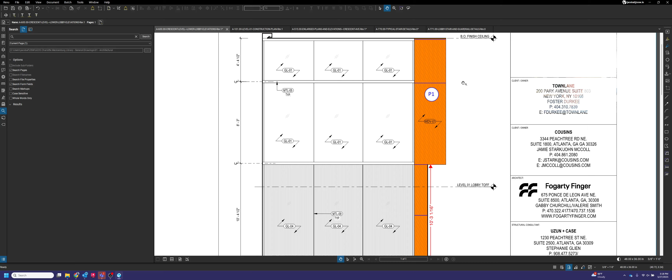When you get to the very top here, this 3/4 inch reveal that we've been talking about, this will be a 3/4 inch full depth reveal. Full depth reveal, all that is, you have a block of material that sits behind the panel, finished with the same material as the panel face. And so everything looks like it's all veneer, but there will be a small gap up there at the top. And we'll see that in our section view when we go to draw that later.

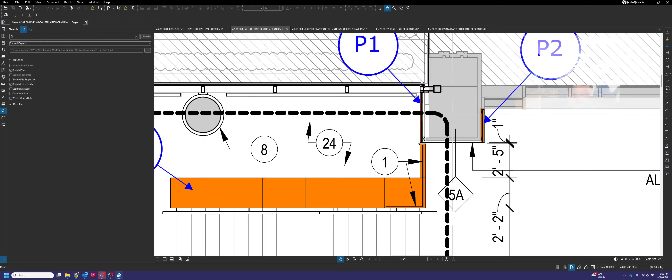Okay, so initial overview for P1. We can go back to our plan view. We've discussed reveal locations. We've also discussed locations of where these live in the drawings from the architect. One area we do need to question is why this length here is different than, or I guess the width here is different than what's shown in the elevation view from the architect.

But we can do that at a later time. Normally, I would suggest at this point putting together a list of questions I have for the project manager and try to ask them all in one email if possible, or one phone call. That way you're not having to call them or email them several times. You can knock them all out here at the same time.

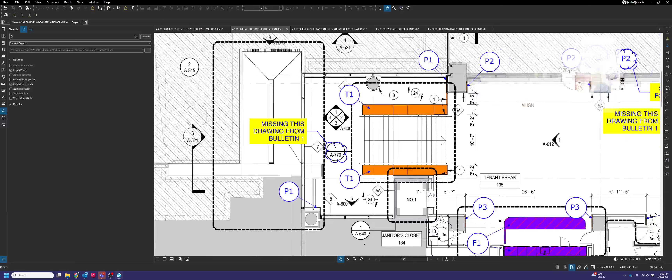So at this point, what I would be doing is rounding up what questions I might have. In our case, the project manager is out sick today. If they were here, I would give them a call, go over that discrepancy where the width is different here versus what's going on in this elevation view. And then I would also bring up the reveal locations and try to confirm if these are in the correct locations for what is expected for the drawing. So a couple things to note there.

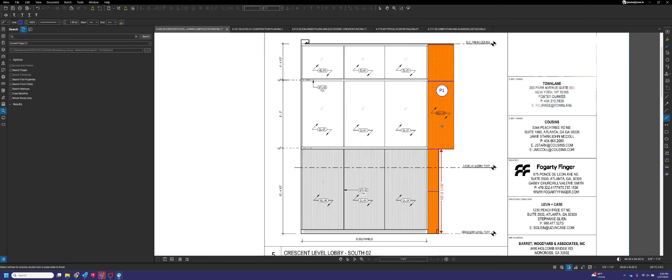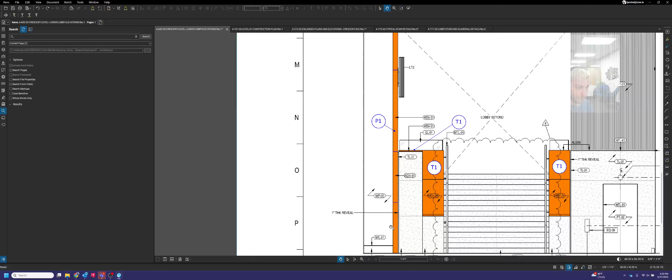These are veneer panels too, by the way. And when you have veneer, you always want to have a grain direction attached to those drawings. In our case, I am going to assume the grain direction is running vertically. It's not clearly stated, and if you look at the hatching on their drawing, it doesn't really do a good job of it because the way they show it, it's almost like the grain is going diagonally. When in all reality, most times panels are not going to look like that. They're most likely going to be vertical here. So I'm going to run with that method of thinking, and we'll assume all these are vertical grain veneer.

All right, and yeah, everything's VN1 it looks like, or WDV01 according to the architect call. So we're going to have one consistent material across the entire drawing, which is great. Makes things a little bit less complicated for us. And you'll see that as we get into drawing panels, there's a lot less notes and complex hardware and different things you have to take note of. Like cabinets, there are so many different hinges and slides and locks and all kinds of hardware. Panels are a little bit more laid back. I mean, they are complicated for sure, but they have a lot less little bits of information to keep track of.

So let's go ahead and begin our drawing here. I'm going to go ahead and get an AutoCAD file open. I need to go to the job folder, drawings, prelim project, and I'm going to pull up the drafting template for this job.

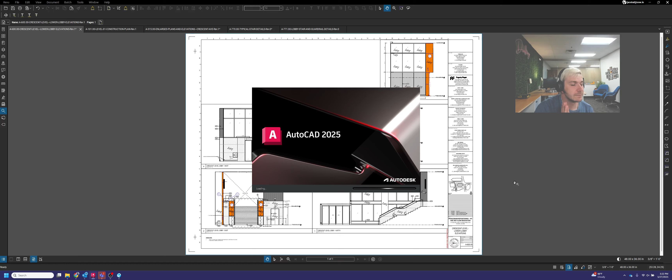Okay, now AutoCAD's taking its time here. I guess while it's loading up, oh, there it goes. Never mind, I was going to say we could look more at the panels, but looks like it'll be up and running in just a moment here. Come on, AutoCAD, you got this. Okay, perfect.

So just like what we've been doing, what I'm going to do is split screen our AutoCAD file with our Bluebeam drawing set. And I'm also going to pull up our drafting schedule over here too. Because the first thing we always want to do with a drawing, once we've opened the template, is fill out the title block on our template, but then we also want to save as and make sure we don't save over the template itself, because this is a community template for the entire drafting team to work off of, so we don't want to claim it as our own and save it as our drawing, because then everybody's going to have to delete it every time.

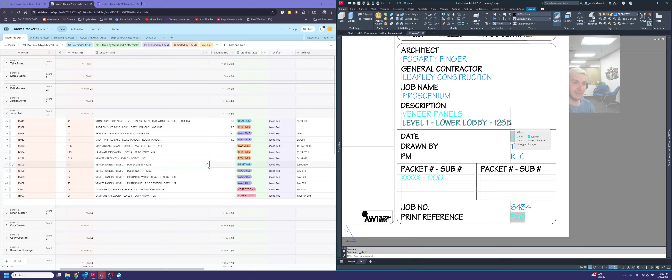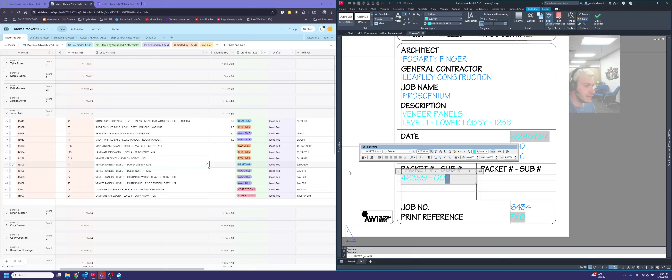So we don't want to do that. What we're going to do here is we're going to write in that these are veneer panels, is our description. We're going to write in here, level 1, lower lobby 125B as the locating area. Okay, and then we need to put in our packet number, which is 46399. And our sub number here, if you scroll over to the left-hand side of your schedule, it is right next to your packet number, 003, just like that. Okay, drawn by, we're going to change those out to be your initials.

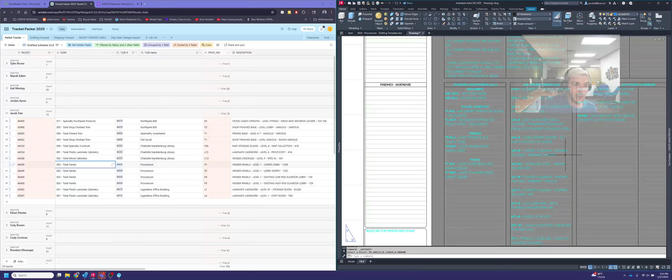And that is all we really need at this time. Now, because we are going to be making all of these panels out of Veneer 1, or VN1, if we go over to the job-specific finish calls, we should be able to locate VN1 in here. Looks like it's right here. I'm going to copy this over using a base point of my grid and pasting it right there.

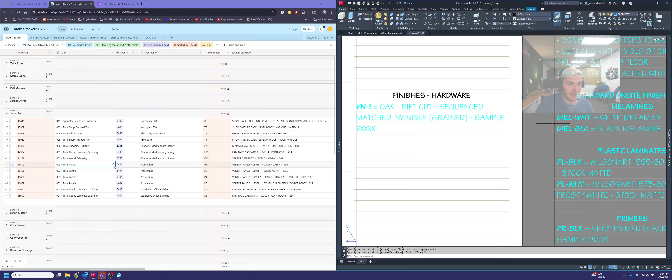Okay, then the other thing I will do, usually save this for last, is fill out the general notes. Because there's a lot less to worry about with panels, it's kind of easy to fill out ahead of time. I think I'm just going to copy this one here: this is all walls, floors and in-wall blocking are by others. We're going to need that note.

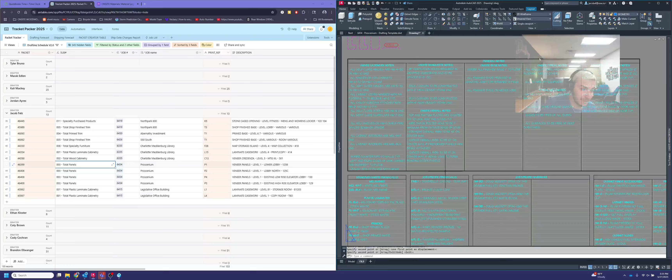Let's see one sec here. Okay, yeah, we're going to need this note here. And then because we're not dealing with any cabinets, we can just ignore this column here. We don't have any banquettes or benches on this drawing, so that note goes away. No die walls that we're building as a company, so we can ignore that area. There's actually no base trim under these panels, which is kind of surprising. Usually panels do have some base trim under them. So anyway, with that being said, there's no notes to copy from there.

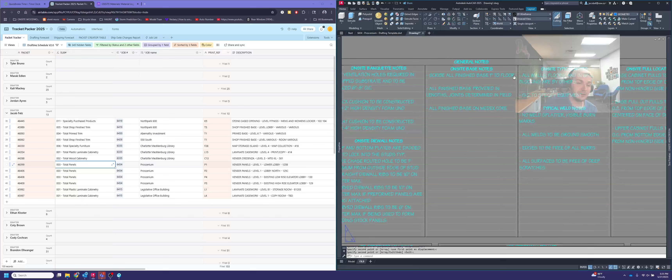No metal shop drawings, so no weld notes are going to be required. And also no pulls since we are not dealing with cabinet doors. So those notes don't apply to this drawing either.

So you're probably thinking to yourself, wow, I don't have anything in my finishes or my general notes. But really, when you're dealing with panels, that's pretty realistic as far as what you're used to seeing. Panels have a lot less information to apply to them, but that doesn't mean they aren't just as complicated as cabinets. To draw them, you still have to take what's in the architecturals, visualize it, and put together a set of drawings, just like you would for any other drawing, like a cabinet drawing.

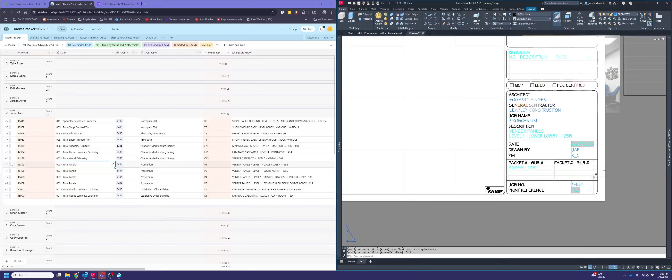So before we move on, what we're going to do is save as, and make a copy of this in the prelim project folder. Let's make sure that we're in the correct job. So we're in Proscenium, Drawings, Prelim Project.

And we need to label this correctly here. So this is P1, PKT 46399. And then I'm going to copy in my description from over here. And I'm going to write at the end, version 1.0, just like that. Go ahead and hit save there.

So we are saving that right to the prelim project folder, and now we are working in our own separate CAD file and not the template.

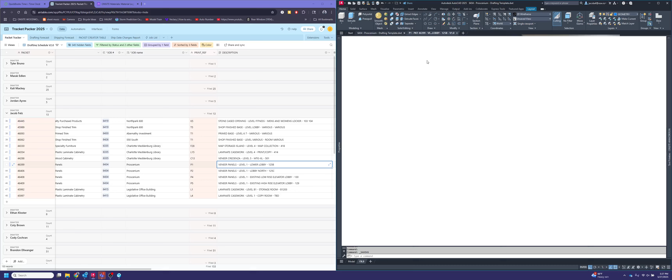All right, last thing before we go into our model space: always remember to change your tab at the bottom to read your print reference rather than the default FX.0. We'll go P1.0 there to match what's going on in our drafting schedule. All right, let's go over to model now. Let's save it one more time.

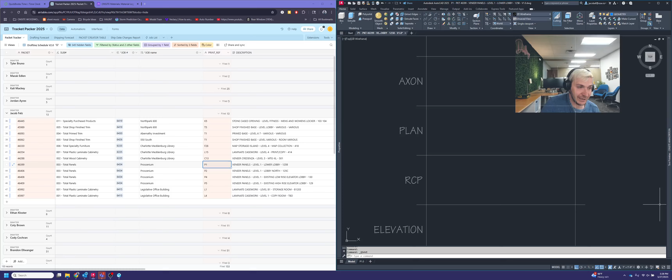Over to our model space, and we're going to start working away at what we have here. So for these panels, it may be easier for us to start with our elevation views and work our way backwards. One thing you can also do, if it helps, is if the project has a floor plan CAD file, you are more than welcome to steal that out of here. Doesn't look like I've actually made one just yet, so we won't be able to steal that exactly, but I'll show you how to do a PDF import so that you can bring in a portion of that floor plan for your drawing. We'll talk about that in a little bit.

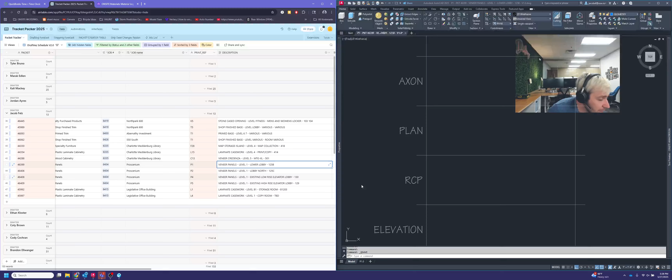We're going to focus on the elevation views first, and then work our way into the plan view after that. So start by pulling up our Bluebeam over here. All right, and we're going to look at the area up here first, the wider set of panels here.

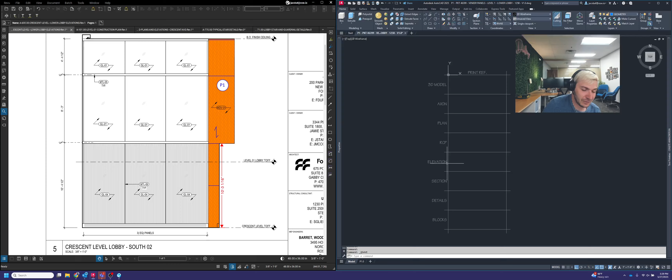Now I am going to plan on moving my elevation view into here later. So what I'm going to do is actually just start off to the side over here somewhere in the blank space and work my way around. All right, so a couple things to take note of.

We know from floor to ceiling, it looks like how tall the ceiling is. If you don't see that here, another area you can look to see if it tells you the ceiling height would be on the reflected ceiling plan. So if you're dealing with, let's see, Proscenium Drawings, Architecturals, and Reflected Ceiling Plan for Level 1. If you are looking for your ceiling height, one really good place to check is your reflected ceiling plan.

More times than not, it is going to be noted here, and it's going to tell you exactly how tall that ceiling is at or above finished floor. So AFF standing for above finished floor. The ceiling here is 15 feet tall.

Let's go back to our drawing and check the math, because that kind of seems a little off. Let me check: 10 times 12 plus 4.5, and then we have 96 for the 8 feet, plus 48 plus 4.5. So 276 inches tall, which is actually 23 feet tall from floor to ceiling.

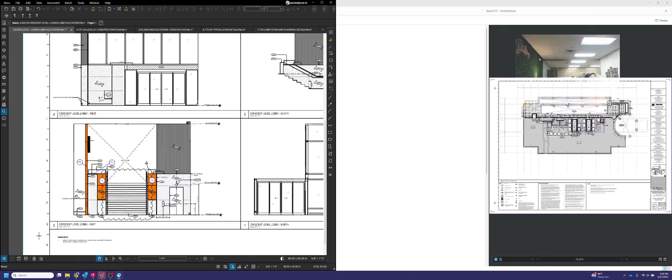So it might be another thing to question the project manager if you're seeing something like that. I'm guessing that probably what is happening here is that they are taking the finished floor from the top of the stairs to the ceiling here. I'm going to guess that is probably 15 feet there, and we can even check it to see.

Not that it really matters to our drawing, but I wanted to rule out any discrepancies we're seeing there. So really it is 15 feet from 15 foot plus a 16th of an inch. I'm just going to say 15 feet from the top of the stairs to the ceiling. That makes more sense, because right here what we were seeing is about 23 feet from the floor to the ceiling here.

This is kind of like a sunken lobby. If you go back to the floor plan, you can see that. This is level 1 here, and this is what they call the lower lobby. So this is almost like a basement level or a walkout basement sort of deal. This is lower than the first floor. So that's 23 feet from the floor to the ceiling here, but 15 feet from the floor to the ceiling there.

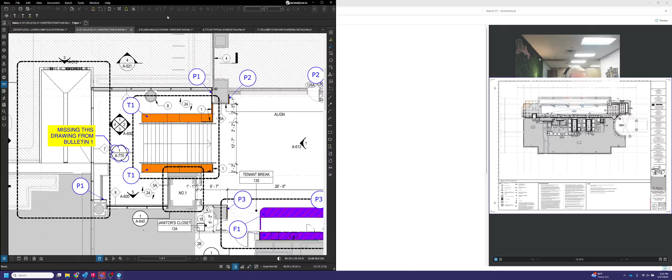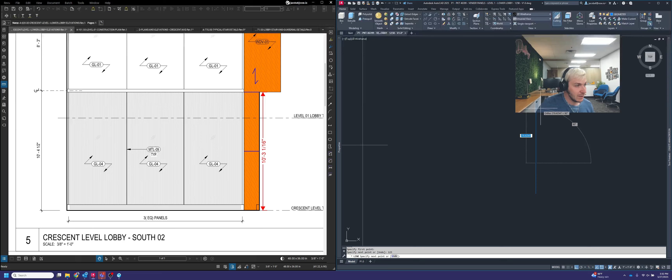Sorry, a little bit sidetracked there, but let's get back to our drawing. Looking at what we've got here, looks like we know that this is 10 foot 3 from the floor to where this kind of L's out. So let's go ahead and draw in a line at 123 inches, or 10 foot 3. We need to find out how far back this sticks out from here to here. Because I don't have that here, I can scale that too.

Sometimes you have to. I would advise not scaling as much as you possibly can, because you're always going to run into some kind of rounding issue. I'm getting a constant extra 16th of an inch for some reason, not really sure why. But I'm going to say this is 1 foot 10, so we'll go 1 foot 10 here.

Okay, so 22 inches across it here. And then from there to the ceiling, we know that the ceiling is 23 feet tall from this floor up, so 23 feet times 12 is 276 inches. So overall ceiling height is going to run all the way up to here.

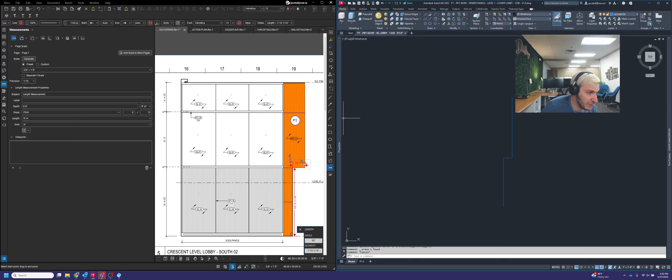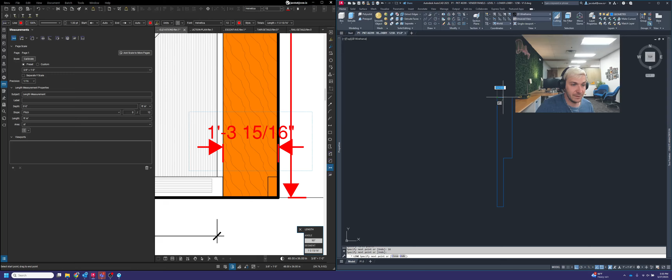And then what we need to do is find out the width of this panel here as well. Once we've done that, the only thing really left to do is locate where the reveals are going on the drawing here. So we're at 1'3" - well, let's say 1'4", so 16 inches this way. So this is kind of the general outline of our panels here.

When we go to draw this at the end, we're going to detail out some of the other areas that aren't part of our scope. For instance, we still need to show the glass, the base trim, the glass up here, and the metal tracks. Even though it's not part of our scope, it's going to be critical that we show it because it allows the installers to see what's happening around our panels. If we don't show it, it makes it harder to locate where these panels go in the field and harder to understand what's happening around them. So we need to show everything that happens around our panels, whether or not it's part of our scope.

So these glass panels here, we are going to draw them in later, but for right now we are focusing on those panels and we will come back and add those in momentarily.

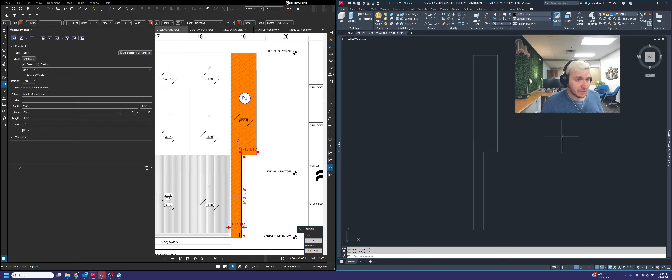So at the very top of the panels, we know we have a 3/4 inch full depth reveal. So first things first, we're going to use the offset command. We're going to offset that line down 0.75 or 3/4 of an inch, just like that.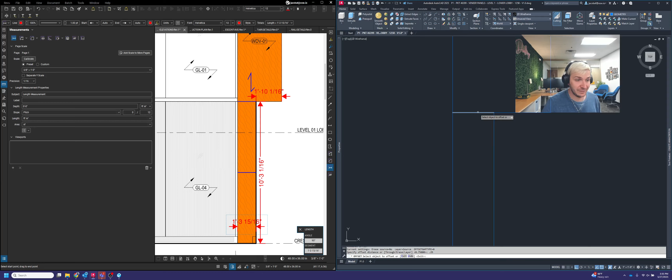And then we've got to locate the other horizontal reveals in our panels here. Okay, so we kind of know that this panel reveal here is 10'3" from the floor to the top of that reveal. So what we're going to see is there should be a line continuing through here. And we discussed these being 1/4 inch spline reveals earlier on. So when we do that, we're going to offset this line 0.25 or 1/4 of an inch down. That way the reveal is in line with the bottom of the panel here and also the bottom of the glass window mullion over here.

Since we do have that reveal located, we should be able to locate the center reveal here, this guy right here. And so what we're going to do is we are going to copy the 2 lines we have for that 1/4 inch reveal. And before I even select my base point, what I'm going to do is shift and right click my mouse. I'm going to go mid between 2 points. And I'm going to go between this point and this point here.

Okay. Now, to be able to properly center this reveal, what you're going to do is hold down shift and right click once more. And you're going to go mid between 2 points once again. This time you're going to click on this endpoint here, which is the floor. And we are going to click on this point here, which is the bottom of our reveal above.

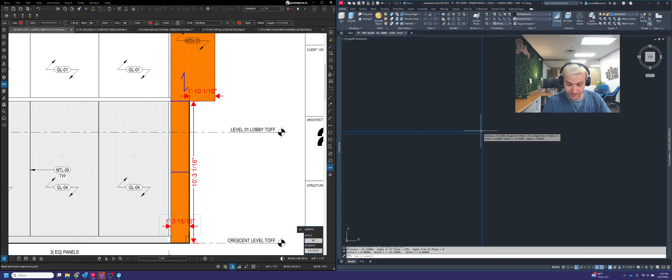To verify that that actually worked, it's not a bad idea to do a distance check. You can do that by typing DIST into your keyboard, and what it will do is give you a temporary dimension which will allow you to check and make sure that this panel from the bottom of that reveal to the top of this reveal, that's showing 61 1/4. You can see that in the distance right there. And if I go here and I measure from the bottom of that reveal to the floor, I should also have 61 1/4. So meaning that our panels are both equal in height. So we've actually completed that there.

That's good to go. Let's move on to the reveals above, or reveal, I guess. There's only one there. We need to find out exactly how high up this reveal is compared to this one here. Now, because we do know where this mullion is and where the next mullion is, what we can do is we can kind of pull a dimension from this, holding down my shift key, down to here. Looks like we're showing a distance of 8'3". Okay, so I know that's kind of a little bit long for panels. We might be able to make that work still, though. Let's go ahead and give it a shot.

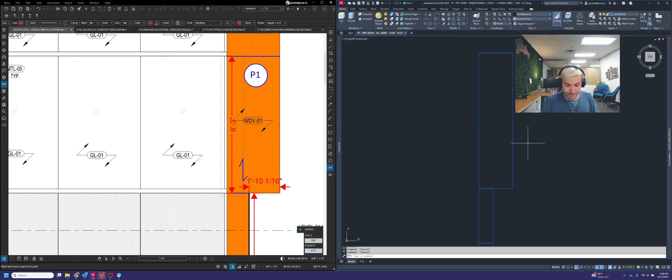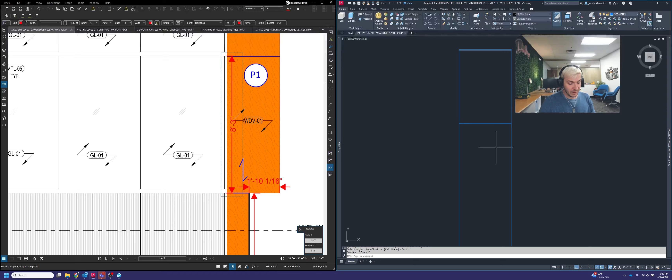So let's draw a line off to the side, and we're going to go 8'3". 99 inches up from there to here. I'm going to trim that line back to there. Okay, and then I'm going to use the offset command once more to make this 1/4 inch reveal drop down here. Okay, so that should be the top of that reveal lining up with the bottom of this mullion.

And this is kind of arbitrary because we are not given these reveal locations on the architecturals, but I'm basing it on things that are located around our panels in the room. So trying to line it up with something that exists within that room. Maybe not even the design intent of the architect, but it does make more sense to line it up with something than it would to not line it up with something. So I'm going to roll with that method of thinking.

Again, if you wanted to confirm it, what you could do is either email or call the project manager, which is Rod Carrero in this case here, and just confirm that with him. You might have to issue what's called an RFI, or a request for information, to the architect to confirm that, or he might just be able to contact the contractor or the architect to confirm these reveal locations. All right, so these panels are pretty well established.

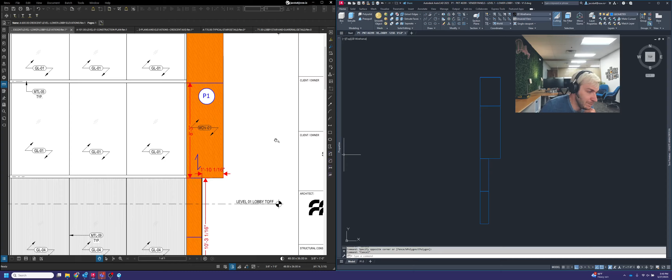We've gotten our reveals placed, we've gotten our panels drawn to the correct height and the correct width. We are going to move to the other side of the room, and we're going to work on these panels here. So for right now, what I'm going to do is draw them the way the elevation view shows.

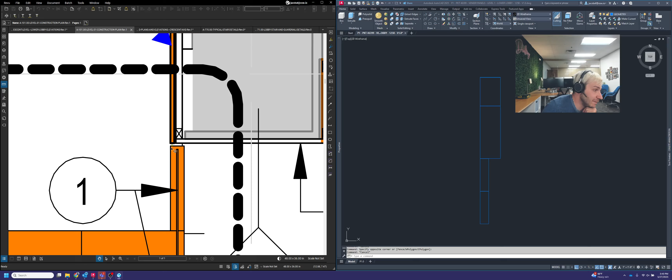Because remember, before we talked about there's a discrepancy between the elevation view and the plan view here. Plan view shows the panels going all the way to the window wall from that 1 inch gap between the staircase wall and our panels. And then the elevation view shows this is a strip of material that goes all the way up.

As unusual as that is, I'm thinking this might actually be more accurate because they are calling out other materials here like wall panel 3 and metal 1 and wall base 1. But let me check one more thing because there's a possibility. Oh, you know what, okay, that's exactly what it is. So actually the plan view is more accurate. Sorry, not to flip-flop on you.

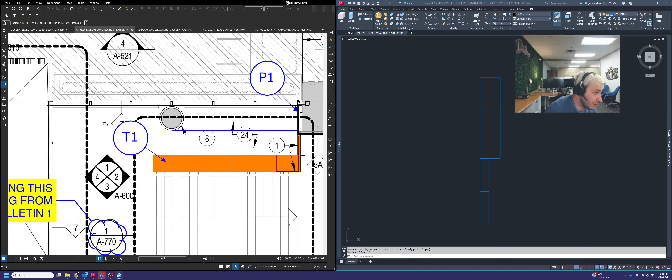But see where the elevation view is called out here, view 2 on A600? That elevation view is taken from here facing this way. So the problem is we are seeing this column blocking our panels. So going back to their elevation view, whoops, sorry. Their elevation view here, this is that circular column right here. It's hard to tell that's what's happening, but this column is in front of the panels.

And so really when you think about it, these panels are going to actually go all the way back to here. You're just not seeing all of them because there's a column in the way right here. Okay, so that mystery is kind of solved. But we still need to find out what that width is from there to the window wall. We can do that here by scaling this view, or we could scale off of our plan view if we needed to. The elevation view is probably going to be a little more accurate, so we're going to give that a shot first and see what that comes back with.

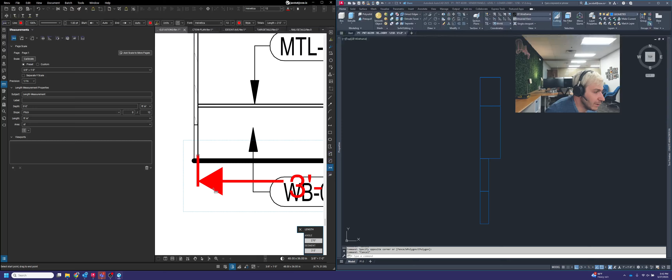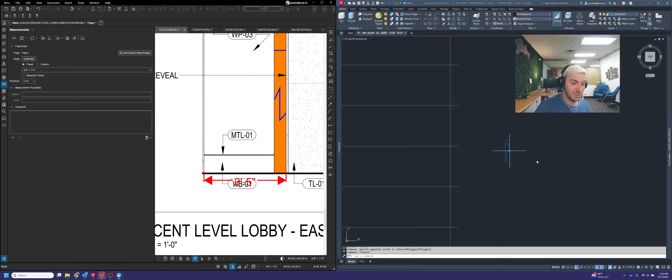So let's go from here to the wall here. It looks like we have a panel width of 3'5", and that's even setting our precision to the nearest 16th. So that's a pretty nice even number. I would say that's probably accurate. We're going to go with 41 inches there for that panel size.

And again, just like we talked about before, the reveals are going to be located exactly the same as where they're located here. So when we go to draw these panels in, let's start by taking a line straight up just like this. So we are still at that, I think it was 23 feet tall. Width-wise, we're dealing with a panel width of 3'5" or 41 inches wide. So we're going to extend those panels this way and kind of trace these out.

So again, thinking about it, I'm looking through the column here, so my panels do go from there to there, not stopping there at the side of that column. Confirmed by the plan view here, because you can see where that column starts and stops, and then that little sliver of that panel where you would see that there.

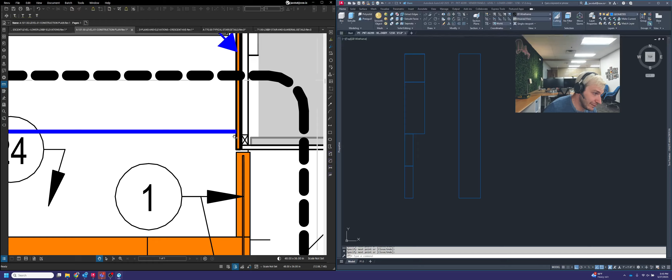Okay, so like we talked about, let's copy these reveals over from this side over to over here. We're going to use the extend command, and we're going to extend those lines so that they're touching the side of our panel here. Just like that. All right.

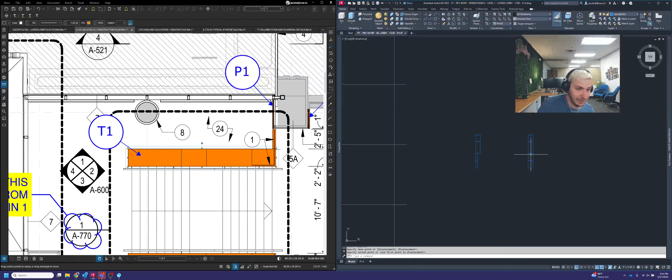And then the last thing we need to do is kind of detail these views out a little better. So right now we're dealing with this, which would be the panels over here, and this, which would be the panels over here. In the elevation view, it's going to be beneficial for our team to show everything that's happening around those panels. So let's go back to take a look at what we've got going on here.

Okay, so let's start with the first view we began with. We have glass over here on this wall. We've got glass up here, and we've got these MTL5 channels that sit between the glass. All right, so we need to draw those in.

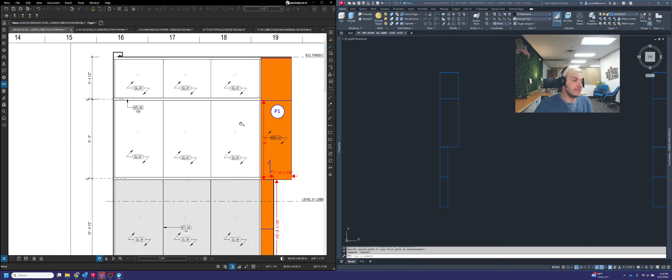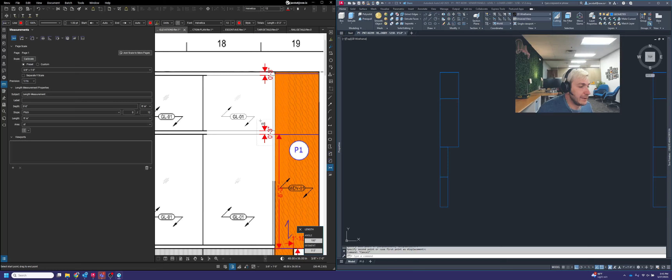Because that is scoped by others, we're not necessarily going to dimension any of that, but we do want to show it as accurately as we possibly can. And so what we're going to do is base all of our information off of what the architecturals are showing. So right now, they're showing these at 3 inches tall. That's 3 1/16, but we'll call it 3. And then this base trim down here, if we measure from there to the floor, is 6 inches tall.

Okay, so let's start by drawing that in. Now remember, when you are drawing something that is by somebody else, you are going to want to use the existing layer to draw that in, not the geometry layer. So we're going to click on that, make that our current layer that we're using for our drawing. Then we're going to take some lines off to the side and draw them at some arbitrary distance here because we're going to trim them eventually anyway. So I just made that 50 inches long, and we're going to offset that line here, so 6 inches tall for that base trim.

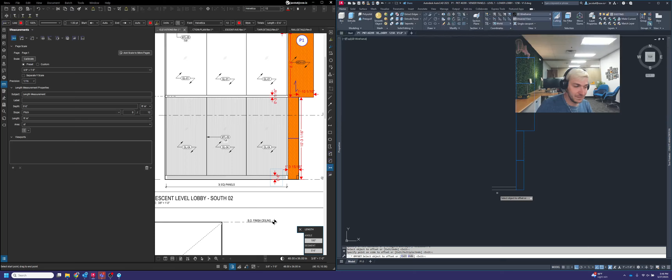And then if you recall, we can either go from here to the center, showing that at 10 foot 4.5, or we can, well, let's do that because that's what they have dimensioned here. Okay, so we'll draw a line from the floor up here at 124.5 inches, or 10 foot 4.5. Okay, then we need to take a line straight across from there, and this is going to the center of that 3-inch mullion. And so with that being said, we need to use the offset command, and we're going to offset this 1.5, or half of 3 down and half of 3 up. Okay, and that does line up with that reveal. You can see that right there.

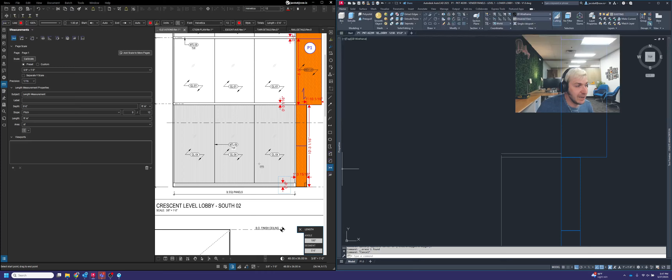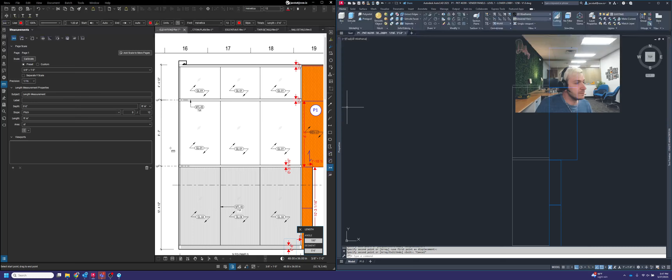It's perfect. Okay, and then we have another mullion at 8 foot 3 from the center of that one to the center of the next one. So we need to take a line from the center here, 8 foot 3 at 99 inches tall. We can copy these lines up using that base point of the middle there. And then we also need to copy these lines up to the very ceiling height up here. So just like that. Okay, kind of represents what's going on here in our view here. We do know that everything over here is glass by others. We got the base trim drawn in, we got the glass drawn in, so that's perfect.

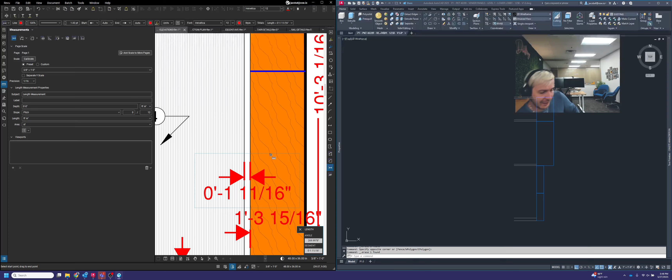One thing that we also need to draw in is between the panel and the glass, there appears to be a vertical mullion here that looks like it's, what are they saying, 1 and 11/16. So roughly about 1.5 inches wide shown. So I think that's what we're going to roll with there. Again, we're not going to dimension that because it is by others, but we do want to show that it is there. So in our drawing, what we're going to do is match what's going on here.

We're going to take a line straight down here, just like that, and a line straight down just like that, and a line straight down just like that. It's kind of like stitching in all of these gray lines here. If you wanted to, let's say these blue lines and these gray lines are kind of overlapping. It makes it kind of hard to see what's happening. If you want to just see the gray lines, what you could do is highlight those. You don't have to highlight all of them, just one of them.

Then you can go up to your layer properties up here, and you can see the stack of papers here called isolate. You click on that, it's going to isolate just the gray lines or the items that are on that layer. So now what I can do with that is offset those in, the 1.5, just like this. All right, and then what you can do to bring those back is if you click on the stack of papers right below that under layers, it will unisolate and bring everything back, just like this. Okay, so now we're seeing our panels, we're seeing the glass by others, we're seeing the base trim. So we've got a pretty decent amount of this view drawn in.

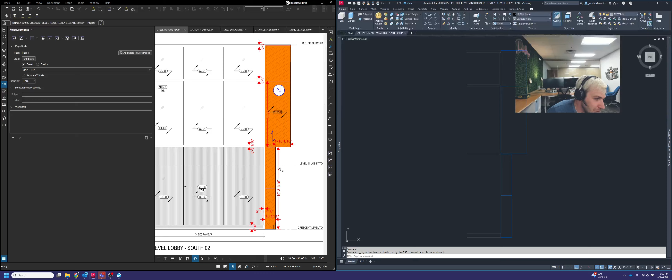I also want to investigate this a little bit further to see what's happening here, if there's a wall here or a doorway or what is happening right here. So we're going to go back to our plan view and kind of take a look at that and see what is the deal with this over here. See if it shows any information. And we're looking at these panels. This side here would be the side on the window wall. So we're looking at that side there. This side here looks like it's butting into a drywall wall. So it does look like there is drywall coming up, kicking back, and then running back up again, almost like a zigzag sort of deal.

So when we go to put in the wall hatching, we're going to make sure that we draw it in just like that. All right, moving forward, one other thing that you'll want to drop in is a break line. So we do know when you use a break line, what you're doing is you're kind of showing, hey, this view continues, but I don't need to show all of it because it's not relevant to what I'm drawing. So what I just did there was I used the break line command.

And when you use the break line command, it's going to ask you for 2 points, one being the start line of where you want the break line to be, the second being the end line of where you want the break line to stop. And then it's going to ask you one more point, which is going to be the center of the zigzag. If you don't click on anything and you just hit enter, it will place that zigzag right in the dead center of that break line. If you click somewhere on this line, it's going to place it right where your cursor is there. So I just hit enter there. It's going to put it right dead center.

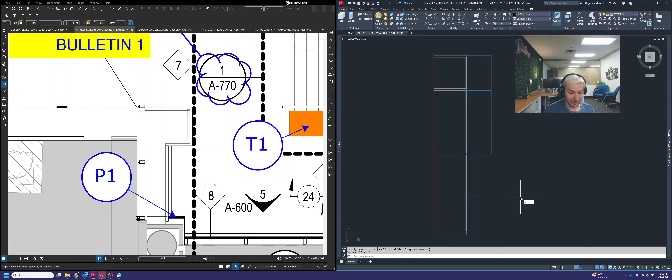What you can do with that then from there is you can use the offset command. And the wall hatch is actually 2 inches wide. If you were to actually measure it, that's what it comes out to. So now that I have that, I use the offset command, offset that zigzag line out 2 inches. And then I'm going to isolate those 2 lines plus the break line here. So highlight all of those, go isolate.

And then we're going to drag and drop the wall hatch in from our hatching tool palette. So wall hatch right here, walls and floors. Drag and drop that in, place it in there, and then delete the outermost line like that. Okay, and that's going to leave you with a very nice clean wall, floor, and ceiling hatch for your drawing here. So just like that, perfect. Okay, that elevation view is what I would call done, at least for right now.

We're going to go over to here, and we're going to work on the next one. So this one over here, again, that's this wall right here, or this column here, behind this column here. Looking at the elevation view, find it again, I'm so sorry. Got a lot of drawings open. There it is. Okay, so looking at the elevation view for that, we have nothing up here. This is all open, but there is a wall back here and a ceiling and a floor. So we're going to need a wall, floor, and ceiling hatch for that.

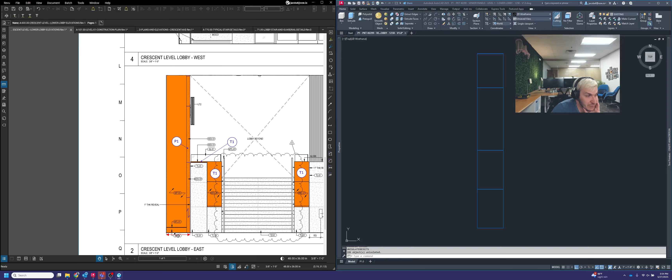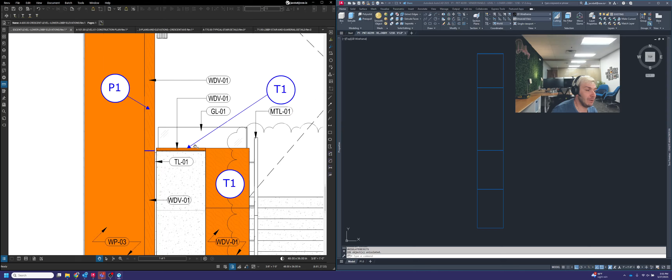We're also going to have to show that there is a tile wall, TL01, right here, as well as this wood wall cap, which is part of another drawing anyway, but we still want to show that it will exist there. This is part of T1. So when we get to labeling and plotting the drawing, we're going to actually point to that wall cap and say see T1 for wall cap reference. So for right now, what we're going to do is focus in on drawing these in.

So, all right, let's talk about this first. So we know, looking at this, we can clearly scale some of this. We know that this is a 1-inch gap, and I can show you exactly where that came from. Let me save this real quick. There's a thunderstorm here. So if you're looking at the plan view over here, remember we looked at this blow-up view earlier today, A770, view number 1.

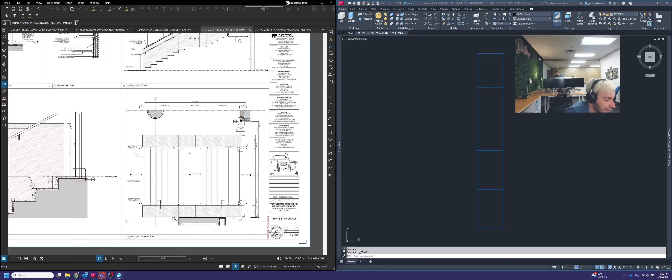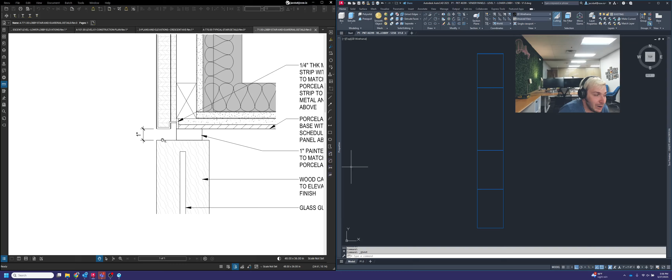You go to A770, view number 1, that is this view here, and then there's a blow-up on top of that, which is A771 here. Now, if we go to A771, you can see that's where the 1-inch gap lives. So it's right there. That's between our panel and the start of the wall cap for the staircase. So let's go back to the elevation view. That's what this double line is here, is that 1-inch gap.

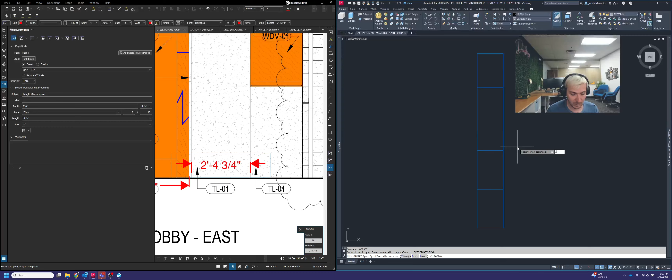Offset 1 inch, just like that. And we're going to find out how wide this is from this line to the 1-inch gap. And make sure that you're using the correct scale on your architectural drawing set. So 3/8 equals a foot and 16th of an inch precision there. Okay, and we're going to go from here to there. And that's 2 foot 4 3/4 of an inch. Okay, so set 2 foot 4 3/4. That'd be 28.75. Okay, that's looking about right.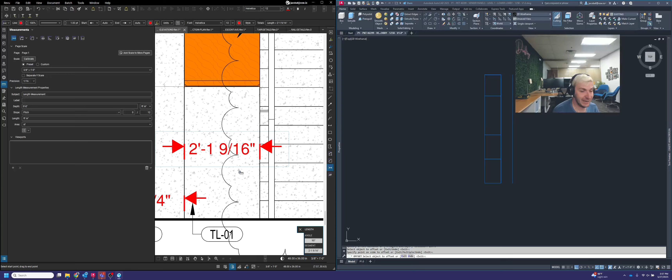Then we're going to go over here and we can measure a little bit further down. Looks like we have 2 foot 1 9/16, so about 2 foot 1 1/2, so 25.5 inches there before you hit the staircase. Whoops, come on, offset 25.5. All right.

Then we got to get the height under control, because right now, just like we talked about, we're drawing these as the existing layer because they are something that is provided by others. At least most of this, the wall cap will be by us, but it'll be in a different drawing. So to not call attention to it, I would suggest putting it on the existing layer as well. So that way it doesn't show up as a bold line, it'll show up as a grayed outline on your drawing.

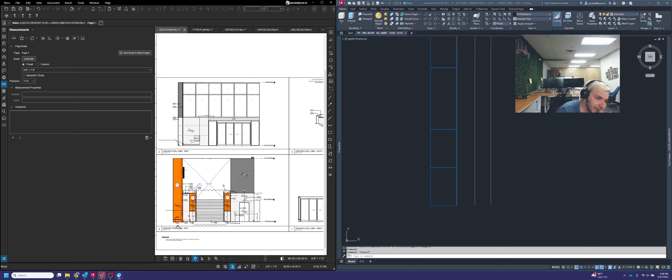You want to show the height from floor to top of wall cap, if we can find out what that would be. One thing you can do is you could scale it, obviously. That would be one way to find out. Something else we can do too is from here, see if we can find a measurement on this. No, not quite. They do show you that wall cap here in the side elevation view going up those stairs, but you don't really get a height measurement on it. And so we may have to resort to just scaling it, which worst case scenario, that's what we got to do. It's not something we're going to dimension anyway, so it's really not super critical.

But if we were drawing that T1 drawing, we want to make sure that that is 100% as accurate as possibly can be. So what I'm going to do is measure from the top of that wall cap to the floor and see what we're dealing with here. Okay, it looks like that's probably about 10'4" and 3/4, give or take a little bit. So let's go ahead and draw that in. So 124.75 be about there. And again, that's going from the floor to the top of that wall cap.

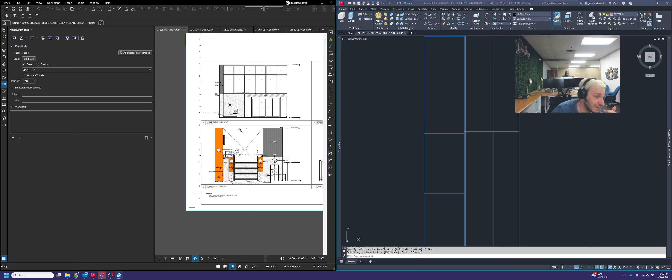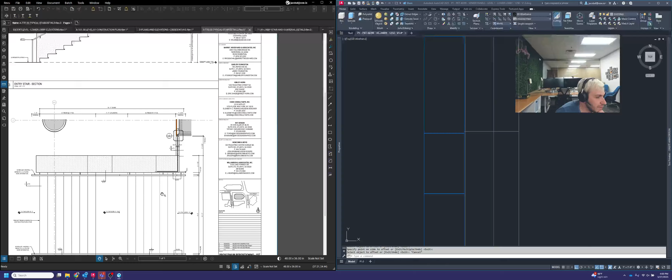And take a look and see if we can find a section view through the wall cap, because I guarantee you they have one here somewhere. Just so we can tell what the actual dimension really should be there. So let's see if we can find that. Go back to our plan view here first, see what we can dig up. We got plan view A770, and does that give us a section view? We kind of have a section view here. View 1 on A771. Let's see what that comes up with.

Okay, so maybe view 1 doesn't give us a dimension on it per se, but there's one over here that does. It looks like they're showing that cap at 1.5 inches with a 1-inch gap below. So we're going to match that here. 1.5 down, and then 1 inch from there to there.

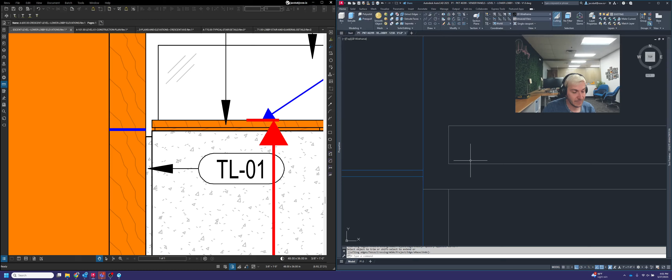All right, now this wall cap, based on the elevation view, actually stops right there. It doesn't carry into that 1-inch gap, so we need to trim that back. Using the trim command, we're going to bring that back to there. And then we can trim these lines back to here as well, because that doesn't go any further than that as far as the height goes. Okay. Now, looking at this, you can see that this is looking at the wall cap. It's going on an angle up the staircase. So really, if you're looking at this, that would go away.

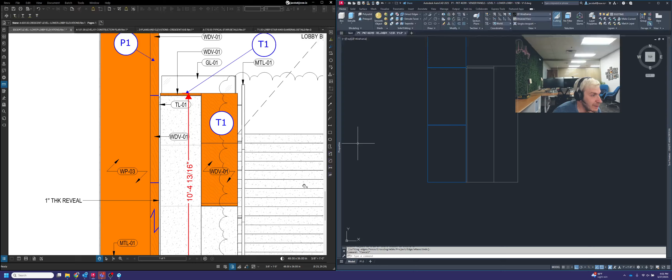And then the other thing we want to look at too is we need to see how tall from the floor to the top of this wall cap here would be. So again, we'll scale that and just check it out. So from top of this wall cap to the floor, looks like 3'11" and 3/16. It's kind of a weird dimension. Maybe they show that in their side views. Let's take a look.

If not, we'll run with that. I just wanted to see if they showed it here at all. Nothing there.

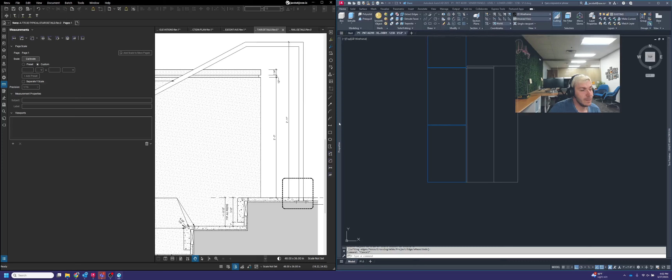Let's see, what did this come out to? 28 3/4. Interesting, okay, no big deal. I just wanted to see if it was dimensioned, and if it's not, that's okay too. We'll offset this up to 3'11 and 3/16. 47.1875. Okay, cool. Always helps to have a calculator at your desk.

Even after years of practice, it's still good to make sure you got your math right there. Okay, so again, kind of like what we did up there, where we know this is a 1.5 inch thick top with a 1 inch reveal below. So we're going to show that just like this.

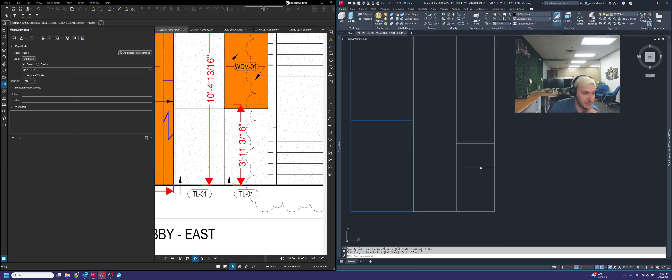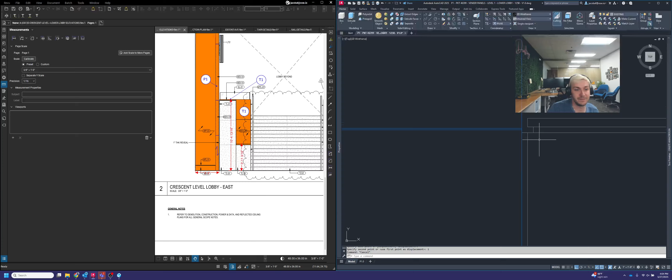Okay, so that kind of represents what's happening there. You might be able to trim some of these lines in a little bit here, because you're probably going to have a 1x1 reveal under that cap. And again, we're not going to dimension it here, but later on when the cap gets drawn, we do want to make sure that it's drawn. So I'm just going to draw in a line at 1 inch tall and set it back 1 inch this way.

All right, that kind of shows off that wall cap there. You kind of see what's happening at least. All right, so that covers that. Now, actually this base threw me off for a minute. There is no base over here. This is that other column that's in front of our panel.

So really that doesn't matter. But we do probably want to show this glass up here. Although, again, it's not by us, but we're going to show it anyway. So we might as well try to draw it as accurately as we can. So kind of, again, scaling what we got here. Looks like a 1 inch setback there. And the glass is a total of, let's see, 1 1/4, so 1 1/4 tall. 1 and 1.25 tall, cool.

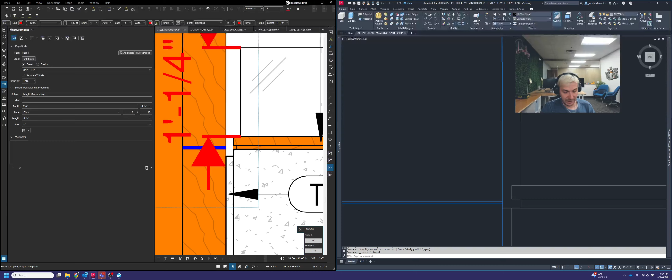All right, not too shabby. All right, so then that glass comes over to here. It's probably going to have another 1 inch setback from this edge. 1 1/4, I bet it's probably supposed to be 1 inch though. So we'll take this line across to here, move this in 1 inch, draw this line down from there, and we'll show the thickness of the glass here too, I suppose, that 1/2 inch thick.

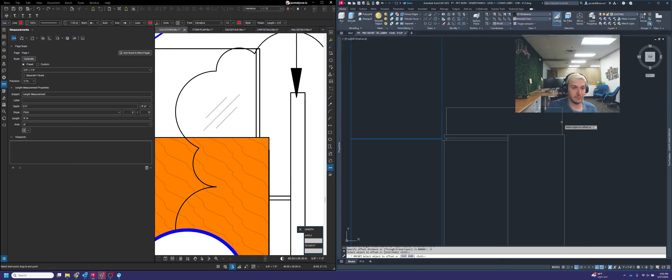Okay, that kind of represents what's happening there a little bit. You kind of see the glass, the wall cap, the tile wall back here, and then of course our panels to the left of that.

We need to draw in the wall, floor, and ceiling hatch. Now in this case we don't have a zigzag in it, so we really could just use the block for that over here. I'm going to drag and drop that in. Rotate this around. And we're going to place this in here just like this.

Okay, I probably will throw a break line in here too. We don't really need to show the whole wall cap, we just need to show a little bit of it. So I'm going to drop in one more break line here. We'll go from the center of that wall cap up to here. Drop that in, make this all the dimension layer for the break line. We're going to trim all the lines from that point on back to there. Okay, that goes away, these go away. And we can bring these lines back to there, just like that.

Okay, now this may not look complete, but really this is all we really need to show. We got our walls, our ceiling, our floor. We've got the tile wall by others, the wall cap, which is by Onsite, but it's a different drawing. The glass here by others. And yeah, that's really about it. We got our reveals located, so that's good.

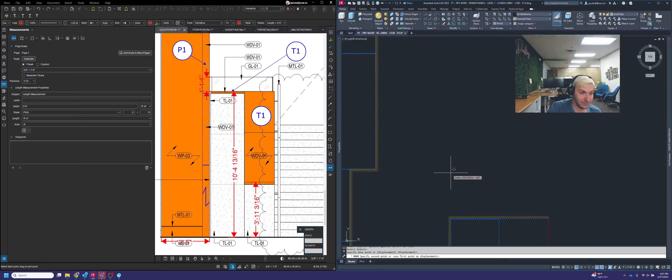What I'm going to do is move these elevation views over to our elevation view grid. And I think I'm going to take a small break, pause the video, upload this portion of it, and then we will go into the section views next, and I'll show you how to draw those. So here I'm going to save this where we're at, upload this portion of it, and then we'll move into the section views next.